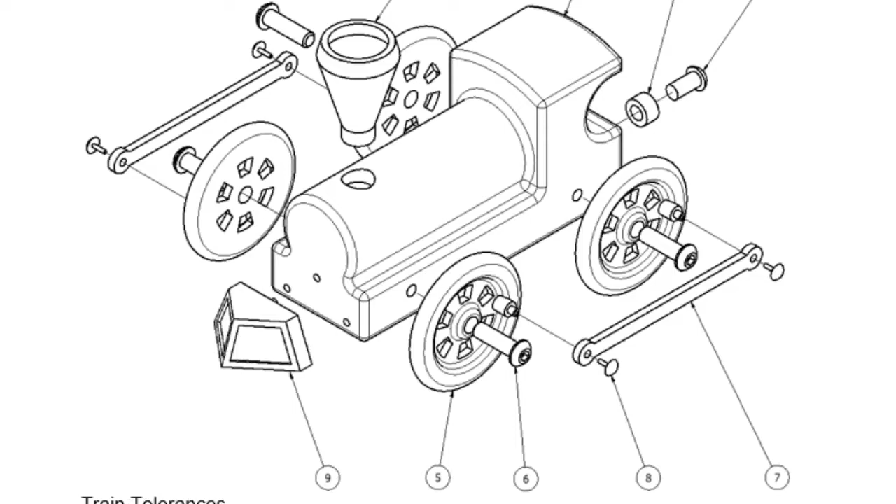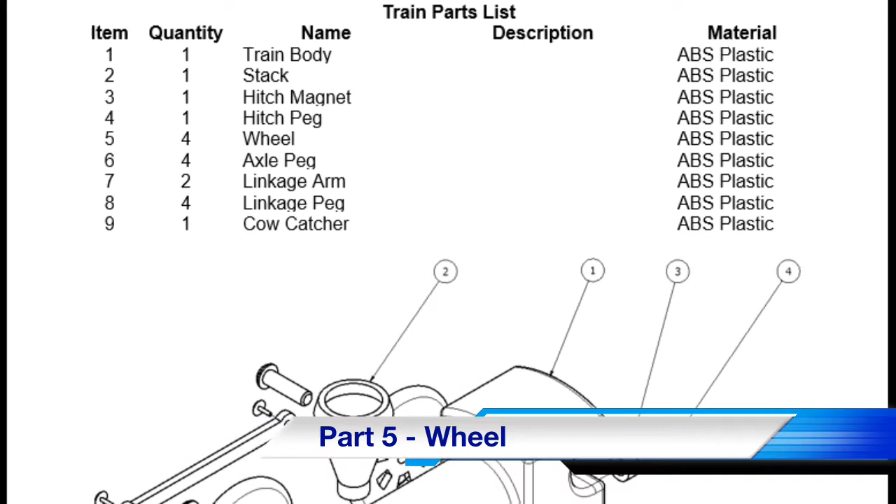Go ahead and open up a new part in Inventor. Please make sure you look at all the measurements so that you know which dimensions go where as you're creating this part.

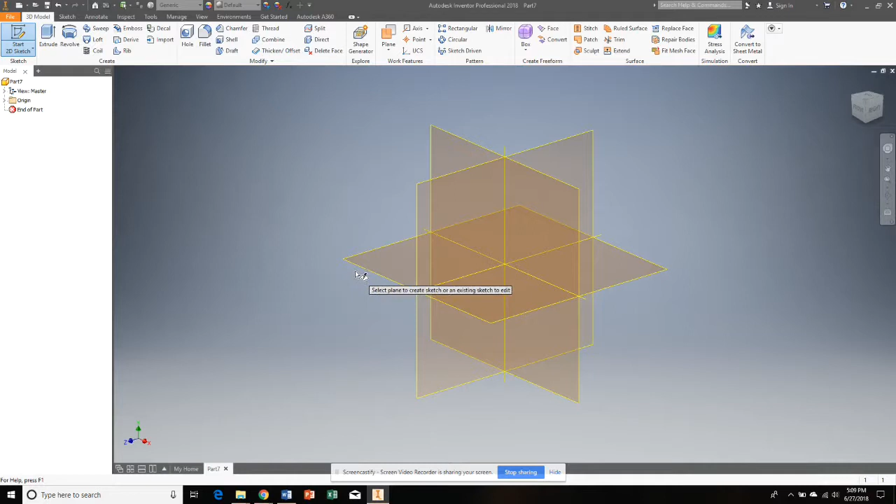Okay, on this one it's going to be a little difficult. We're going to have to do a lot of revolutions and some patterns on here to be able to get this finished out. First thing I'm going to do is make that cutout shape you see, and I'm going to do that on the XZ axis so that I'm looking down on top of it. Move it over so I can see it over here.

The first thing I want to do is get that outside curve. So I'm going to use a circle tool and draw that outside curve, and I can see that the radius of that is 0.125. That's the radius, but we need the diameter, so I'm going to say times 2, which is 0.25.

That's pretty easy. Now the rest of it, I'm just going to try to draw it with the line tool close to what it looks like. I'm going to start at the coincidence of the top of the circle where the little arrow is pointing at the red line, and draw it out. I want to make sure I'm at 90 degrees as I draw it out, and I just want to kind of draw what it looks like. It doesn't have to be perfect.

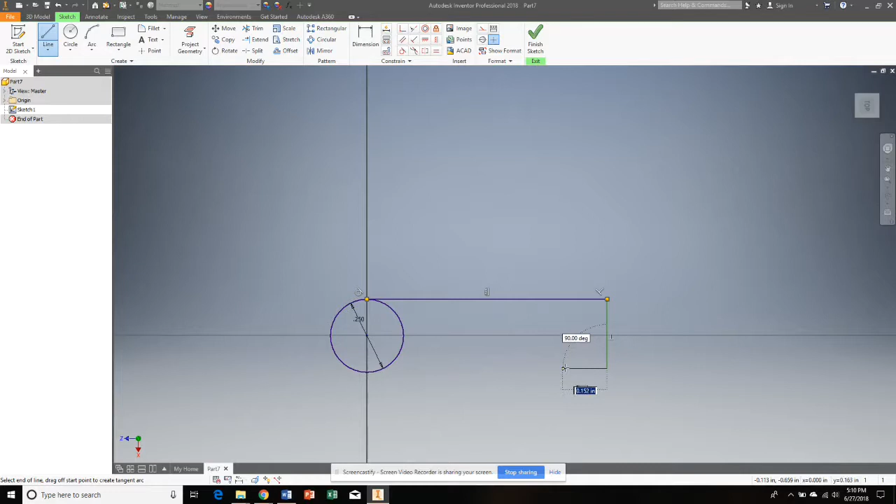I want to make sure that my dimensions are at 90 degrees. I'm drawing along this x-axis here because I know that it's halfway in between, if you look at your measurements. So there's kind of that shape.

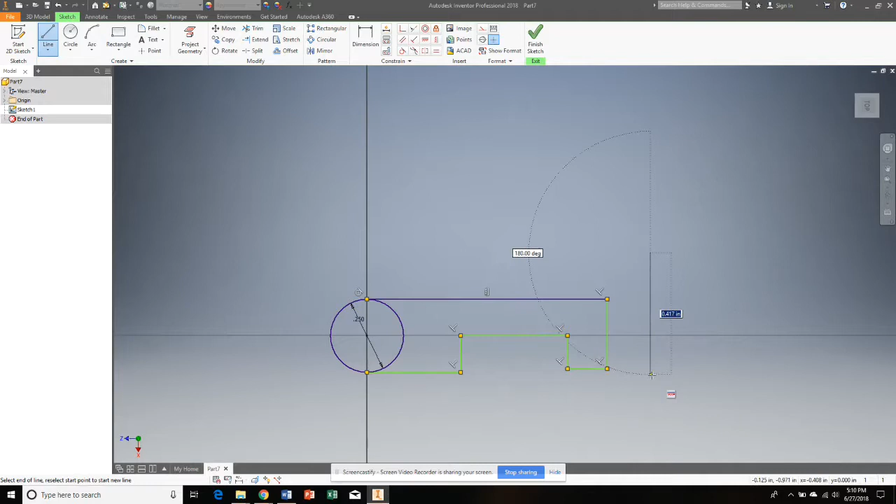The last piece we need to do is draw my center line, and that's going to be the center that this thing revolves around. Right click, OK. So this wheel is going to revolve around this line.

So I need to put some dimensions in here now. I'm going to dimension the distance from the center of the circle to that line, and that's going to be 1 inch.

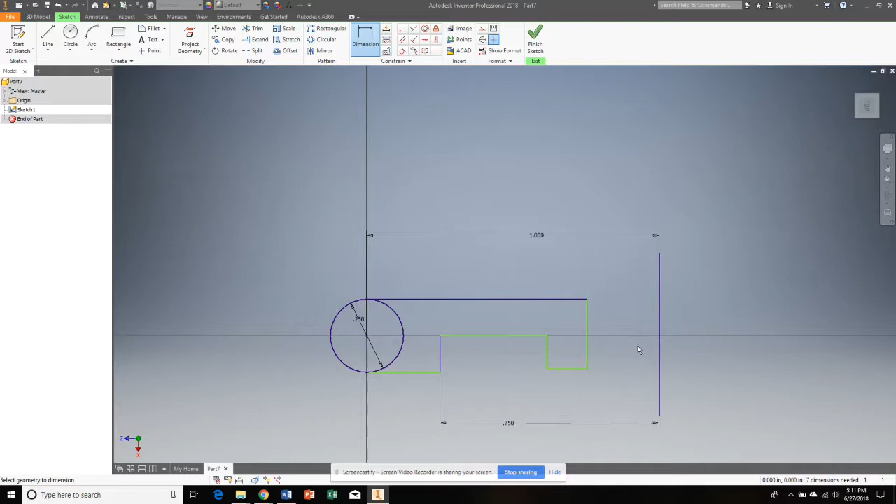I'm going to dimension from the center line here to this inside shoulder, and that's going to be 0.75. Then I'm going to dimension from the center line here to the inside shoulder, and that's going to be 0.25.

Then the last one I need to dimension on my width measurements is going to be that diameter of the revolution, that center hole. If this is going to be the center of that hole, then I need the distance that it would go around, and as you look, that distance is 0.28. So I'm going to dimension the distance from there to that center line, and say 0.28 — but it's not 0.28, it's going to be 0.28 divided by 2, because I don't need the diameter, I need the radius.

Last thing I need to do is check some of my other dimensions here and see if the height here needs to be the same as the circle. So it's going to be 0.25.

Then I need to make sure that the vertical constraint — because you see over here my top view is turned sideways — so my vertical constraint here and here are the same place, and it says that they are. So even though it's not all blued out, I should be able to say that that is a complete shape.

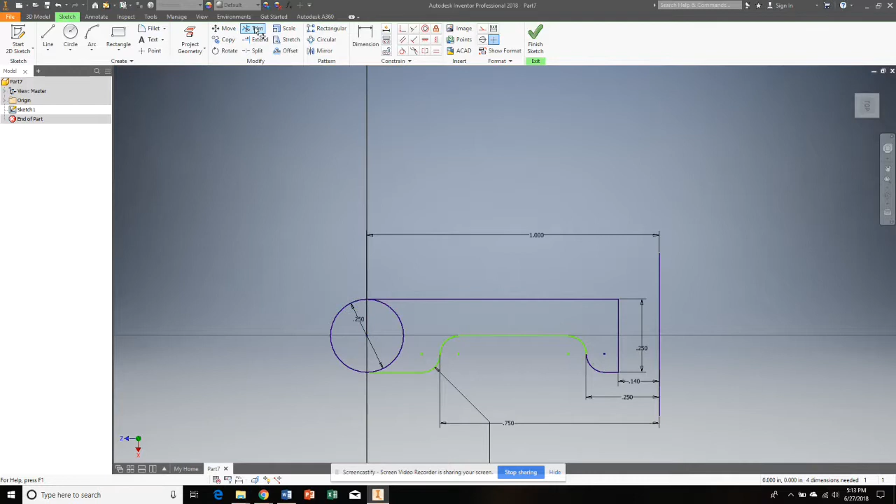So now I'm going to finish the sketch. Oh wait, no, before I do that, I need to trim some things, and I'm going to trim the inside of this circle. Now I have my shape that I want it to be. Finish my sketch, move it so I can see what I'm doing.

I'm going to do a revolve. I'm going to choose this profile, then come over here and choose my axis — it's going to be this axis. Spins it around. That's looking pretty good.

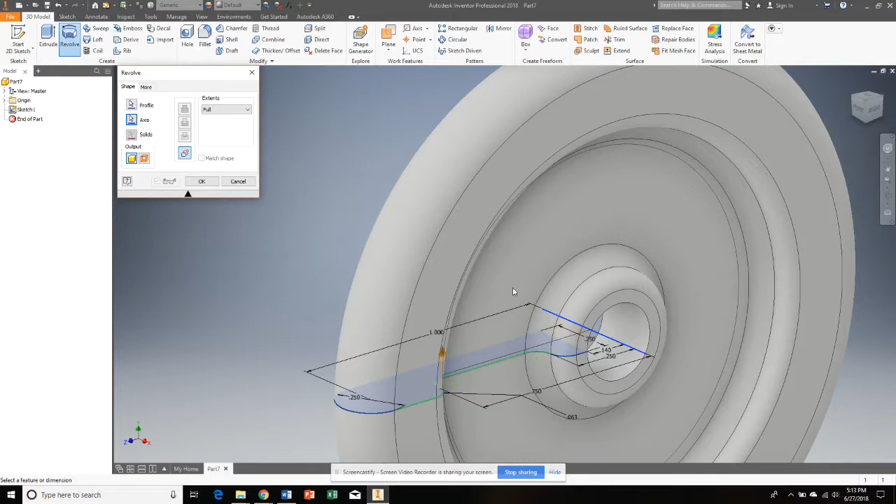Now we're going to put those little windows in this inside flat surface of the wheel. In order to do that, I'm going to create a new sketch on this surface, so I'm going to click on it. It moves it around so that I'm facing it.

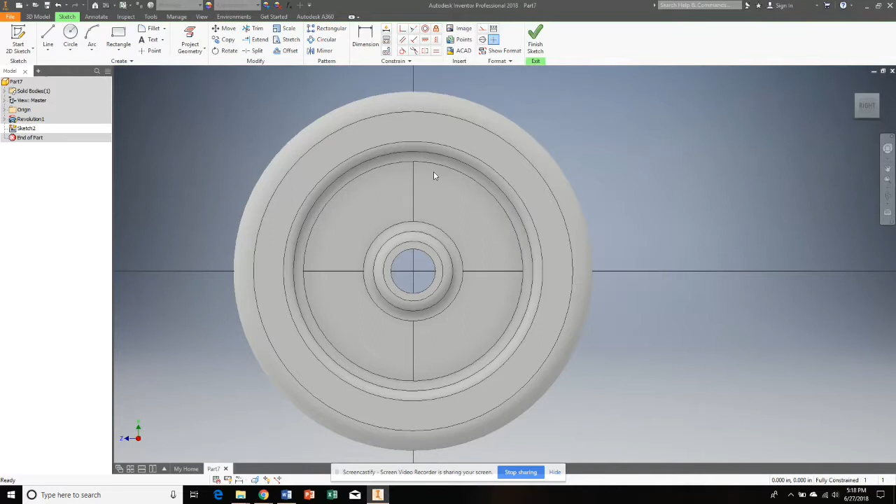With all these circles in here, all these different rings that I have, it gets really confusing. So what I'm going to do is hit F7 on the keyboard. When you hit F7, it gets rid of all that, like cutting it in half, splitting it down the center, so it's a little easier to see.

Looking at the bottom half of this, the instructions on the circle show a bunch of angles, 15 degrees, 30 degrees. What I'm going to do is start drawing some lines so I can get those degrees. What I really want is one window right here that I can then duplicate all the way around.

I'm going to start, and since it doesn't give me the green dot, I'm going to go to X0 and Y0, click, and give myself a starting point. I want to make sure this line goes outside of my wheel. I can cut it off later, but I want to make sure it goes outside the wheel, that way I'm not connecting it to any of these extra little marks that are in there.

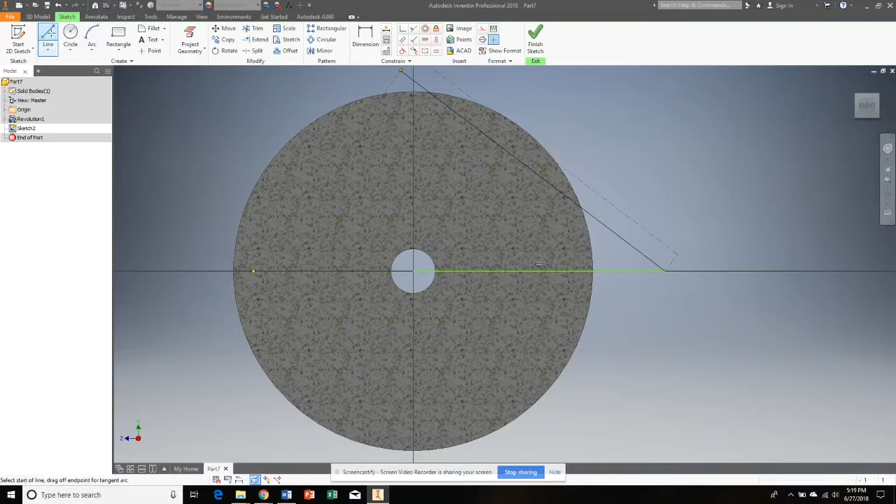I'm going to create a new one, and I'm going to repeat this, and it's going to be 15 degrees. If I want to come outside the wheel and hit tab, it gives me my degree marker here, and I can just type in 15, and it automatically gives me that 15 degrees. You can see that right here, 15 degrees.

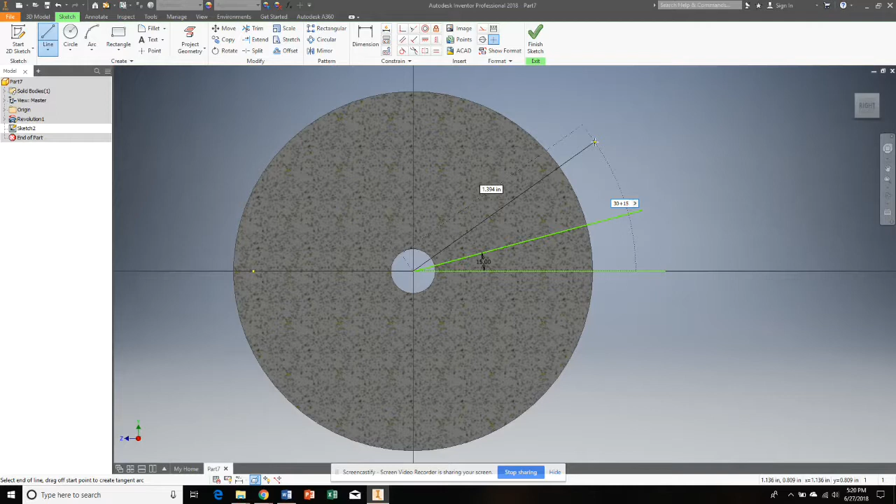I'm going to do it again, take my line tool, come out here, and hit tab again. This one says 30 degrees, but it's not really 30 degrees from the origin, it's 30 degrees from the last line, so it's going to be 30 plus 15. I could type in 30 plus 15, or just type in 45 and let it do the math. That's where I'm wanting that little window. I don't need to keep going because the rest of them are 30, 30, 30, 30, 30. So there's where I want it.

Now I've got to create the curved outside of those little windows. I can do it with a circle, or I can do it with an arc. In this case, I think I want to do it with an arc.

I'm going to come over here and draw my line, just cut it through, and draw this. I know that the outside radius of that window is going to be 0.625, so I can type in 0.625. And that creates that arc.

Now it's not in the right place. I'm going to come over here and choose my coincident constraint, which means I'm going to move this point. If we zoom in, I'm going to move this point, and I want to move it there. When you do, it moves that curve for you.

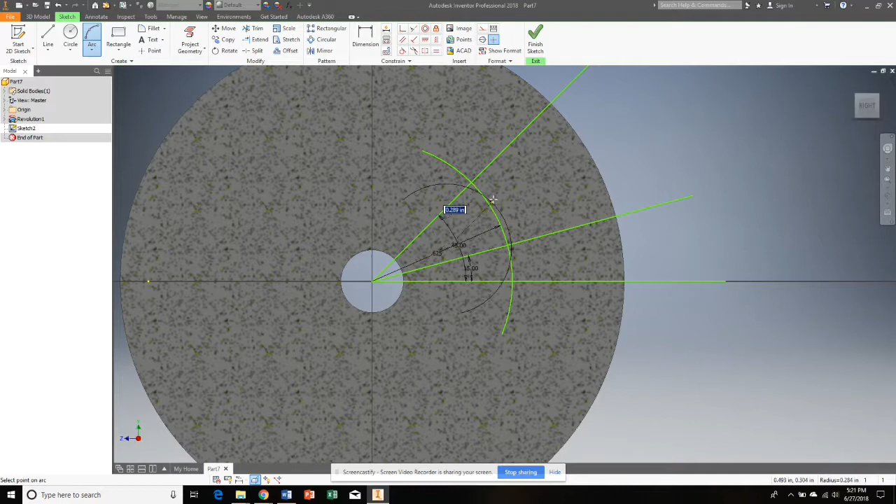I'm going to create a second arc. It's below it because it's smaller. I'm going to draw that line, and it doesn't matter as long as I don't get past the center between here and here. As long as I don't get that curve past there, it doesn't matter where I put it. I just need to be able to see where the center is going to be, that center point there.

I'm going to come back and choose my constraint. No, I didn't do that right, but I can come back and fix it. I'm going to choose that constraint and put it right there.

The last thing I need to do is change that dimension for this one. That dimension needs to be a radius of 0.375. I'll click on it, 0.375. And so there's my little window that I need.

So what I've done is created two arcs. I could have done a complete circle, but I've created my two arcs, and now all I need to do is trim away everything that is not that window. I'm going to come here and choose trim, and start trimming away everything that is not that window. If I can trim everything away, it leaves me just the window there.

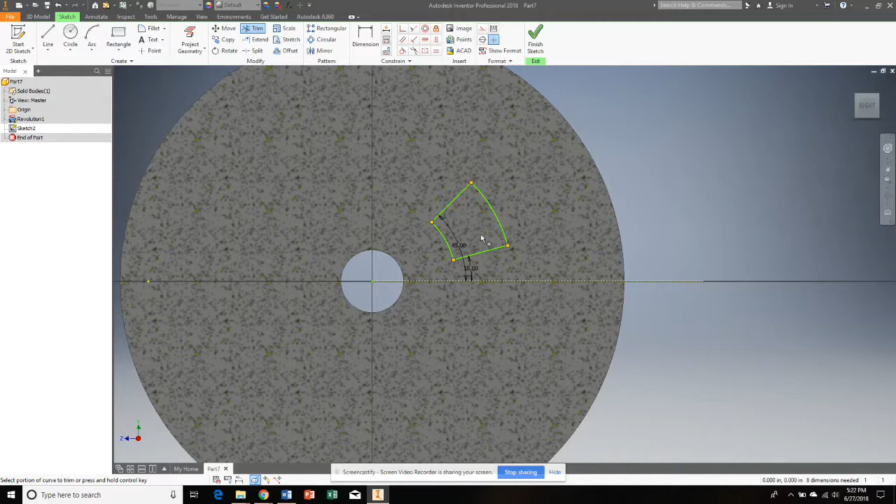I'll finish my sketch and extrude it. I want to extrude all of it so it all goes away, so it negatively extrudes.

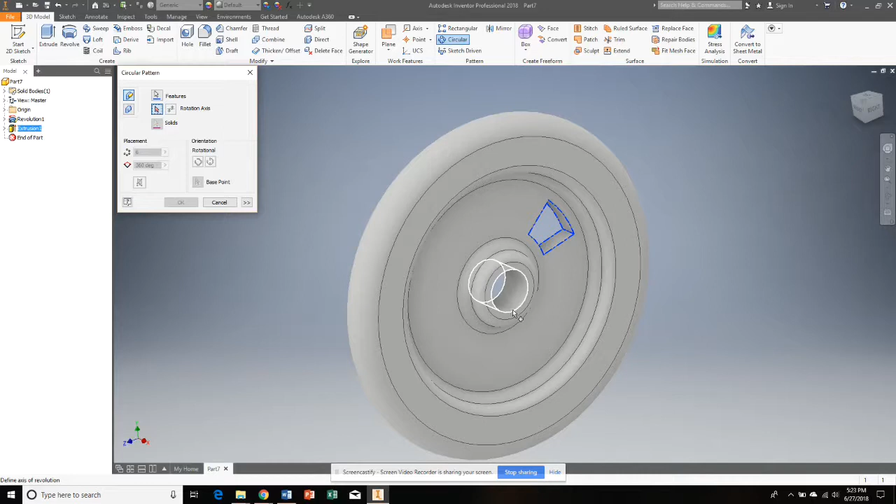So now I have one window, and I'm going to do a circular pattern. I'll choose the feature - I could try to grab it on the model, but everything moves around and I might grab the wrong thing, so instead I'll choose my extrusion on the left side. Then I choose my rotation axis - you can pick any circle, it doesn't matter which. I'll choose the center one, and it creates the pattern going around. There are 6 little windows, which is the default, so I'll say OK, and it created 6 little windows for me.

Okay, the last piece I need to put on here is an extrusion that's going to be attached to the linkage arm. It's going to allow the wheels to be attached to the linkage arm, so there's going to be a little extrusion coming off of here. To do that, I'm going to start a new sketch on the same surface we were putting those little windows on. It's going to go half underneath the raised part of the wheel here. This is really confusing, and I don't want to sit here and fight with it, so I'm going to hit F7 again - that way it cuts it in half for me, which is less for me to worry about.

I'm going to choose my circle tool, and it's going to go right in this area here. I'll make sure my Y is equal to 0, and the X could be anywhere because we're going to dimension it. So I'll click and put in my diameter, and my diameter for that circle is 0.25. There's the circle.

Now I have to dimension it, but before that I need a center point because there's no real center point here. So I'm going to project geometry and click on that circle, and it creates that circle in yellow so I can actually see it. Now when I come back and dimension, I can dimension from the center of that circle to the center of the main hub, bring it down, and that distance is going to be 0.7. So now I have that circle right on the y-axis, y is 0 on the x-axis, and the distance out is 0.7.

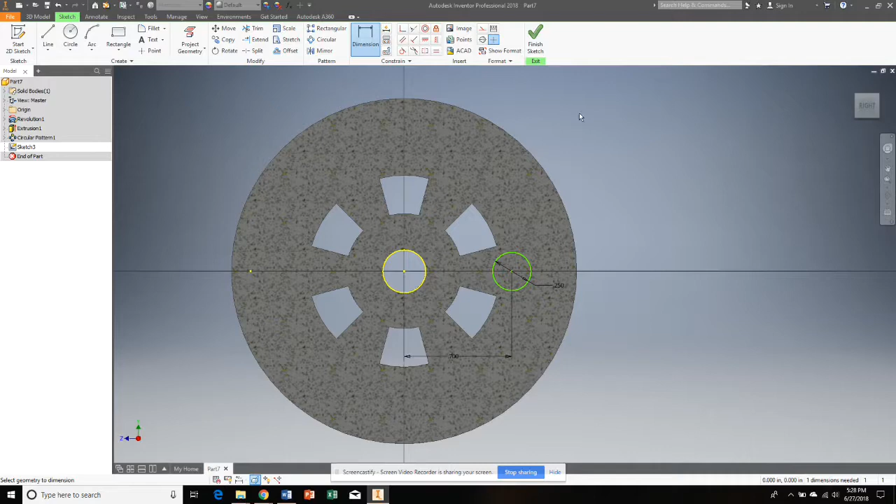I'm going to finish my sketch - you can see it's half on, half off - and I'm going to extrude that circle. It's going to come out, and the dimension is 0.375, so I'll set that to 0.375.

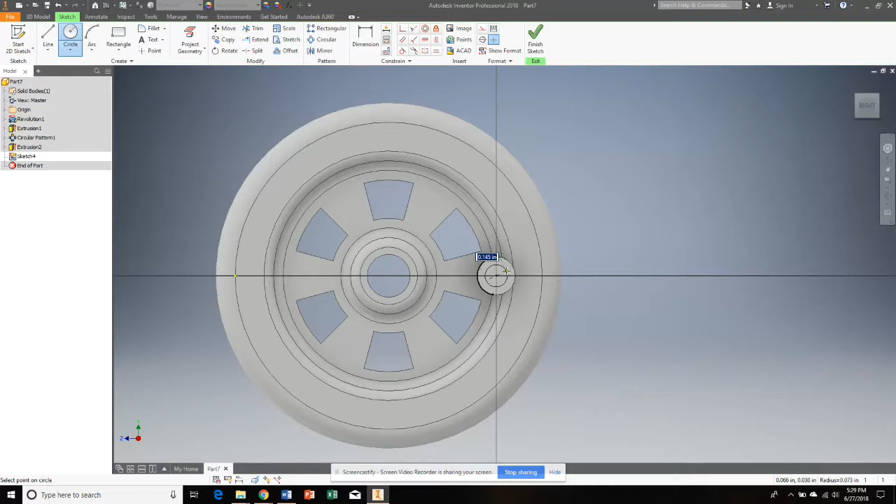Okay, now I need to make another - there are 2 more extrusions coming off of here. I'm going to do a sketch on this surface, take a circle, and put it in the center of that. Green is good. I'll take this diameter and make it 0.125. Finish my sketch, extrude it, and this one comes out 0.125.

And the last one is an extrusion that goes in. I don't want to sit here and fight with it, so this time I'm going to make a hole. I don't want it to be linear, I want it to be concentric. I'll choose my plane - the top little surface - and I want to change the size first so it actually looks like what it's going to be. That is going to be 0.0625, a little bitty tiny hole.

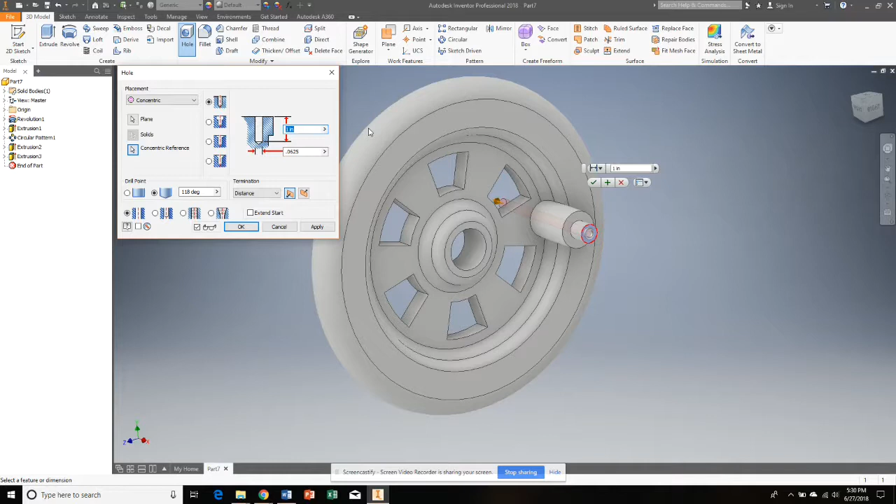Now I want to choose my concentric reference, and it puts it right in the center there for me. I don't want it to go all the way through - it actually goes a distance, and that distance is 0.25. And there you have it.

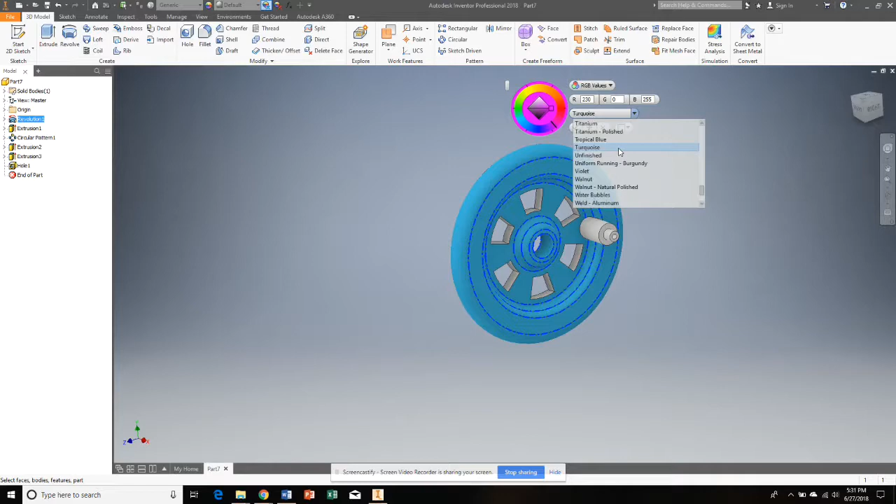The last thing we need to do is put some color on it. So I'll choose my color wheel, and I think this time I'm going to go with a little bit of purple, putting it on my revolution here. I'm not liking that. You know what, I think this time I'm going to put some shape to it, because there's lots of different choices for you there. Oh, that's not bad - Water Bubbles.

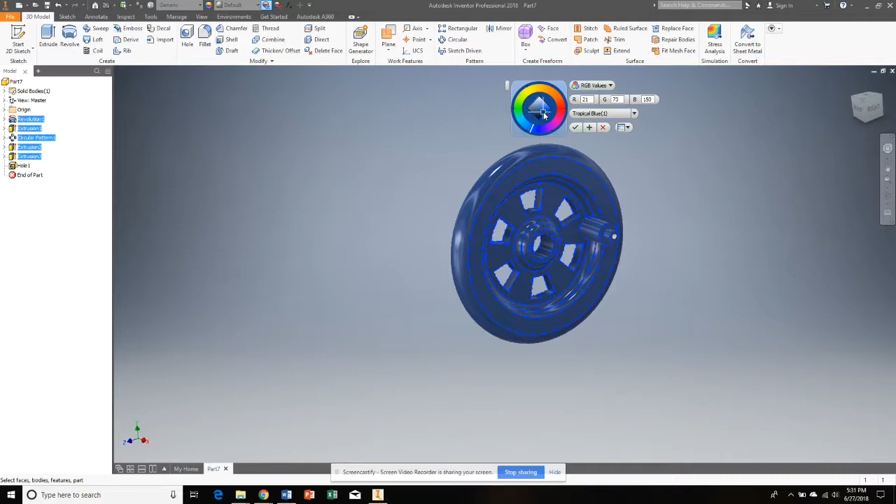Make sure I choose my extrusions, and if I choose everything on the left side here, then it fills it all in for me. I can make it a little bit lighter, a little bit darker - it's black wheels, and I don't want it to be completely black, so a little bit of a blue tinge. There we go, I think that looks pretty good. Make sure you save it in the right spot.